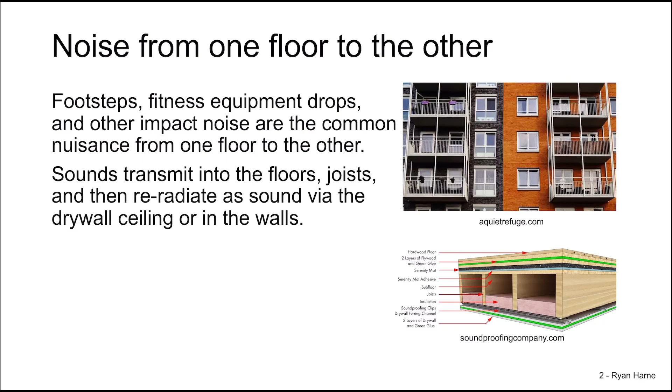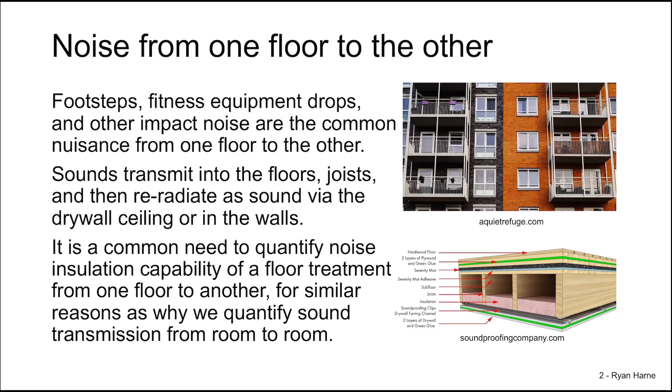Footsteps, the drops of fitness equipment and other household objects, and a wide variety of other impact noises are common nuisances of sound transferring from one floor to the next. The impact creates vibration in the floor and joists, which re-radiates sound via the drywall ceiling or walls. It's a common need to quantify the noise insulation capability of the floor treatment from one floor to the next, for the same reasons we'd want to quantify sound transfer between rooms through walls. Impact Insulation Class (IIC) is the metric created to help us quantify how well a floor treatment insulates one floor from the next.

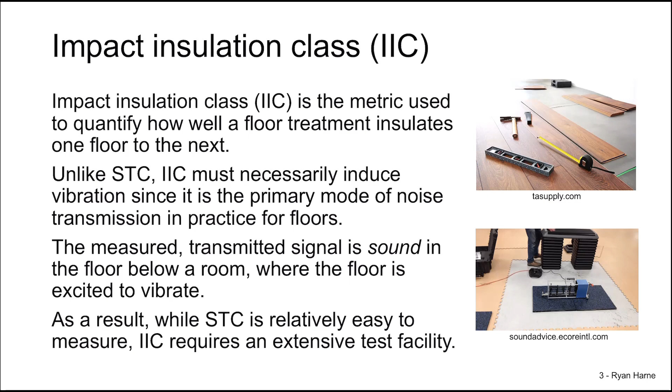Unlike STC, IIC must necessarily induce vibration, since vibration is the primary mode by which noise transmits between floors. The measured transmitted signal is sound recorded in a room below the floor being excited. So while STC is relatively easy to measure, IIC requires an extensive test facility for this metric to be evaluated. How is it evaluated?

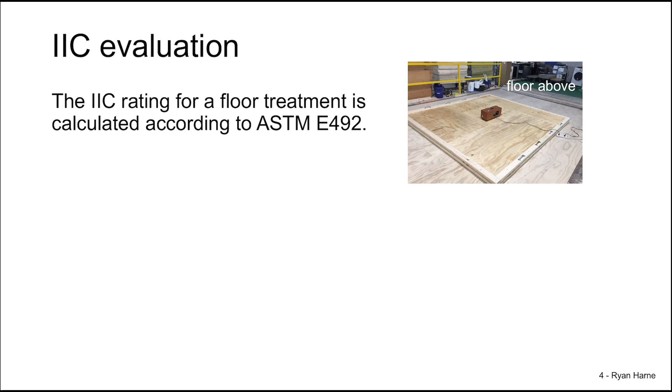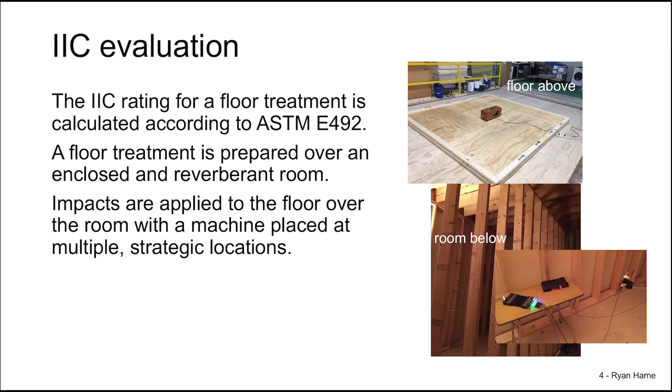We take our floor treatment and prepare it according to the ASTM E492 standard. Below the floor is a reverberant room, in this case a wood frame with nothing particularly on the walls or floor except drywall, and then a concrete floor. Impacts are applied to the floor over the room with a machine placed at several strategic locations. We measure the SPL at locations in the room below and spatially average their overall 1/3 octave band recordings. Sound into the room must only occur through the floor, not through any other means, so the isolation of the path must be very strictly related to the floor over top of this room.

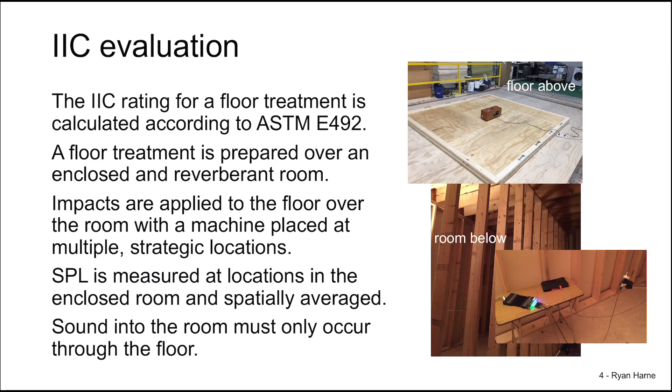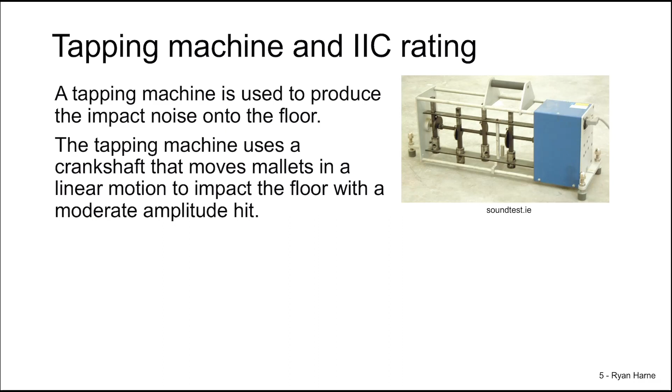A tapping machine is used to produce the impact that creates vibration and thus noise through the floor. It contains a central crankshaft and mallets that move linearly up and down, hitting the floor with a moderate impact. Sound builds up in the room below to a steady state level, at which point we acquire the SPL in that room. Here's the tapping machine in action.

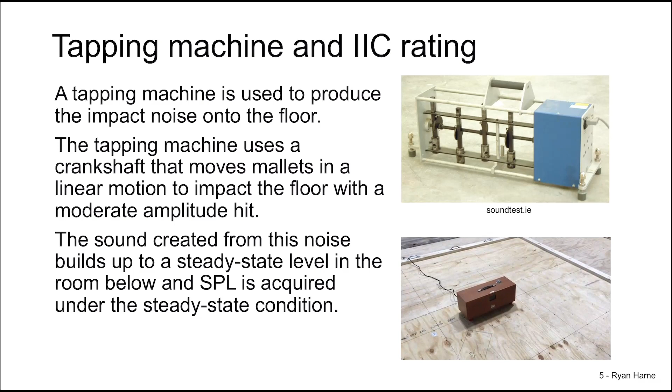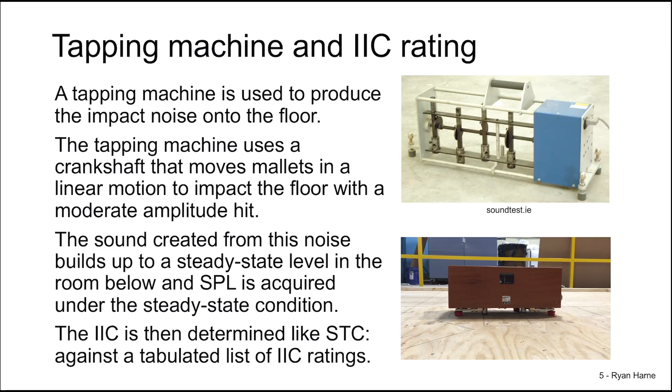For such simple behavior, these machines are quite expensive. The IIC is then determined from our SPL readings in a way similar to STC: we compare the SPL readings in the 1/3 octave bands to a tabulated list of IIC ratings. We won't go into further detail of the method, since IIC is much more involved to compute.

Let's put this into perspective, because impulsive noise is something people are very sensitive to. Walking, thuds, drops, and so on are much more common from floor to floor than between neighboring walls of adjacent rooms. So floor installations themselves might include variables that could cause issues with interpreting IIC in practice. In other words, there are many ways sound could flank our floor treatment.

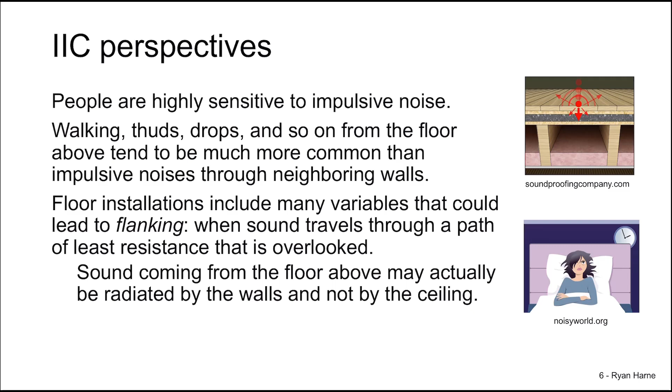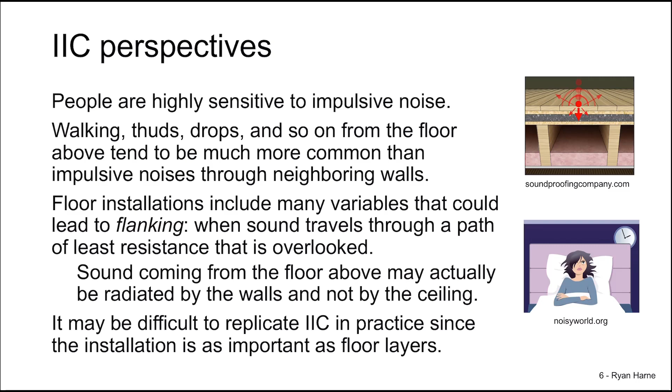Flanking is when sound travels through a path of least resistance that is overlooked in the design process. Sound coming from the floor above may actually be radiated by the walls and not the ceiling, due to the fact that the floor and joists also connect to the wall framing. So it may be difficult to replicate IIC in practice, since the whole installation is involved in the transfer of sound from floor to floor.

But there are ways of enhancing IIC and ensuring great noise insulation between floors. The first and foremost way is to program the space: never put a foot traffic area above a bedroom. Instead, place rooms of similar functions over each other, whether in a residential, commercial, or industrial space.

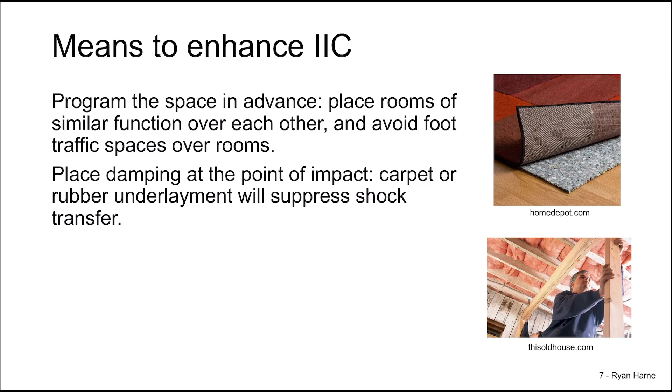Place damping at the points of impact: underlayment, whether carpet or rubber underlayment, will help suppress shock transfer, like the carpet underlayment shown at the top right. Insulation in the cavities is important to reduce mid to high frequency noise, especially when the floor above is a hardwood surface. Finally, mass: concrete floors are much better at enhancing IIC than stud or wood joist construction, although this comes at much greater cost.

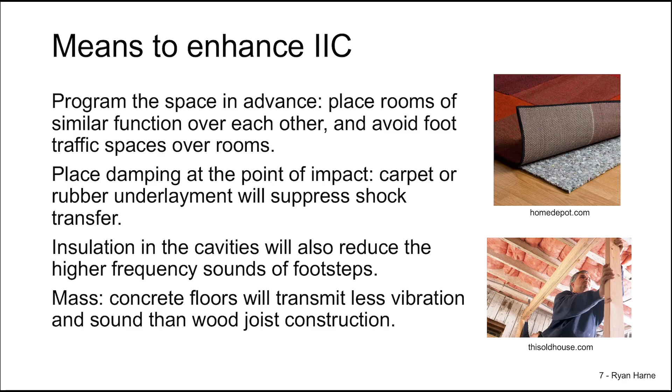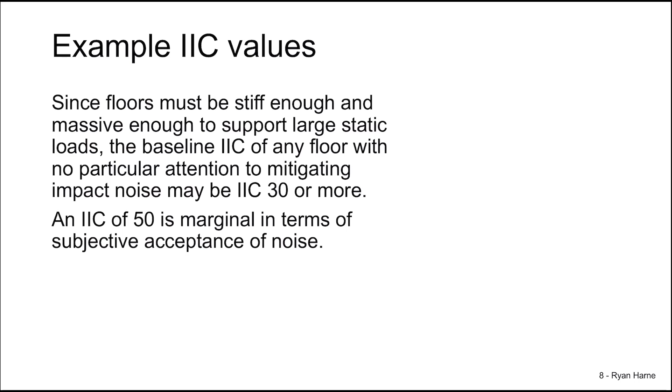To understand what we should expect regarding IIC values, we need to recognize that any floor constructed to actually support the static weight of a building will result in a fairly high IIC of at least 30. An IIC of 50 is marginal in terms of how people would feel insulated from sounds coming from rooms above them. An IIC of 70 would result in almost no complaints ever, since people would be almost perfectly insulated floor to floor.

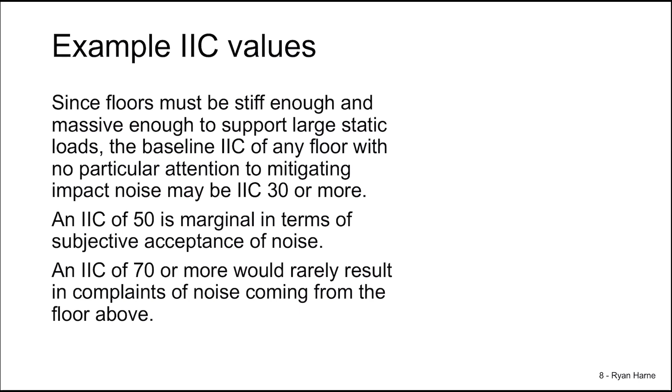Let's look back at our floor joist construction. In this case, there's a hardwood floor and joist construction that directly supports the drywall ceiling to the floor below. This structure will result in an IIC of 33 without any particular attention to mitigating shock transfer.

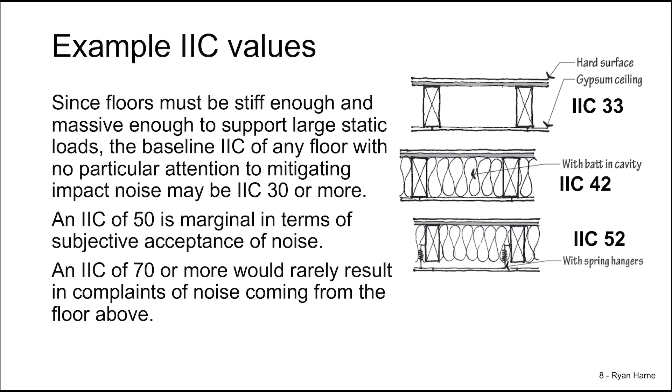Now, if we fill the cavity with insulation, the IIC increases to 42. And if we resiliently hang the drywall, the IIC increases to 52. The cost of this installation is starting to rise, as we've not only added insulation, but also clips all along the joists to help support the drywall ceiling.

Considering the fact that if we simply had installed carpet instead of a hardwood floor, we would have resulted in an IIC of 65 without even needing insulation or resilient springs to support the drywall ceiling. This needs to be taken into consideration, since oftentimes aesthetics might come in the way of good acoustic design.

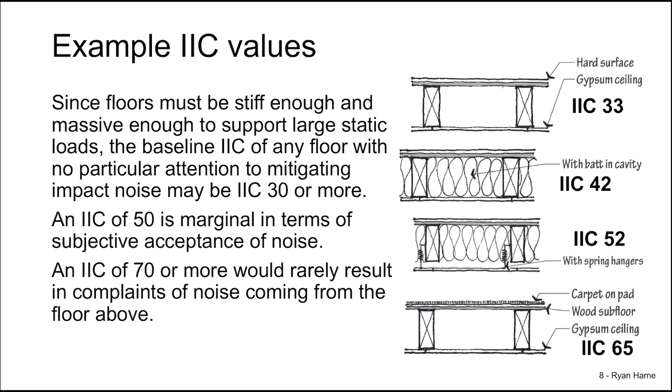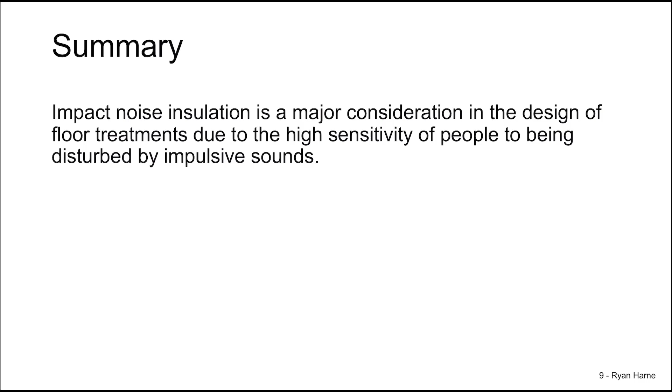So let's summarize what we've learned. Impact noise insulation is a major consideration in the design of floor treatments, since people are very sensitive to impulsive sounds. IIC is the standard to quantify the effectiveness of floor treatments to mitigate sound transfer. Measuring IIC, though, is much more difficult than measuring STC, requiring dedicated facilities and equipment. To enhance IIC, simple guidelines can be considered, but sometimes the aesthetics preferred by a consumer or client may lead to inherent challenges for us as designers and acousticians to stop shock noise.

That's it for this video. In the next video, we'll learn how all of the sound incoming into a room affects speech intelligibility.